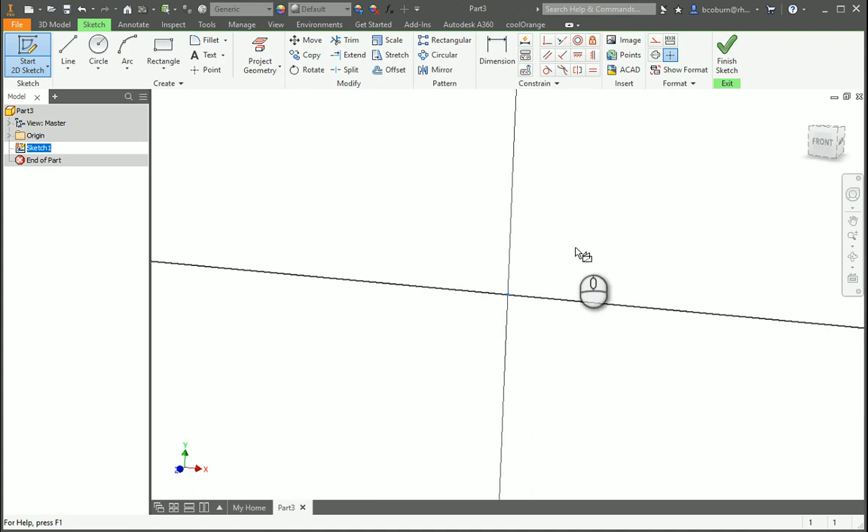So I'm going to hit Start, Sketch, click here, and draw a circle. I'll make sure it's right on the origin, and make it 0.495 because my hole is 0.5, and I need a little room for that to go in, because otherwise there's too much friction and it's not going to rotate in the real world.

I could make it 0.5 in Inventor, but then when I actually made the part, I might get into too much friction, and over time you can figure out how this works. If it's made out of wood, it wouldn't be a problem to sand it, but we may 3D print this handle. So I'm going to hit Finish Sketch.

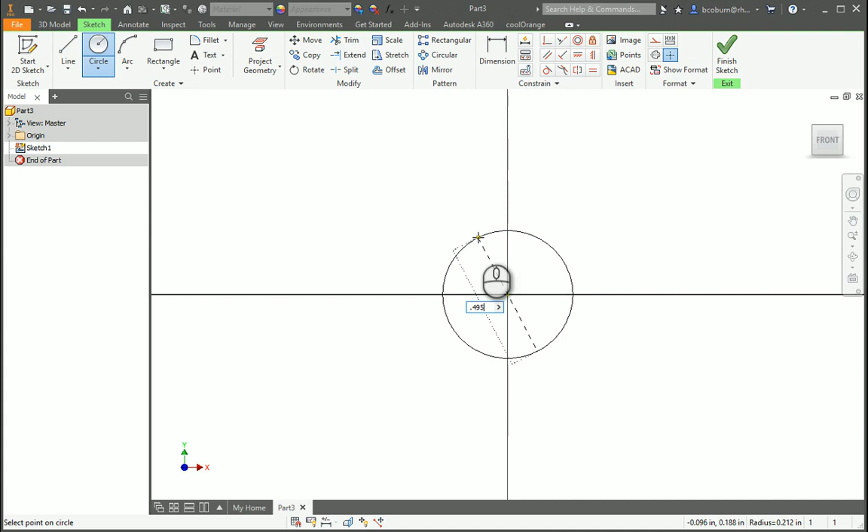And we'll have our little thing. Now what I'm going to do next is come over here and pick a plane that makes sense to me for my handle. So the YZ plane makes sense to me.

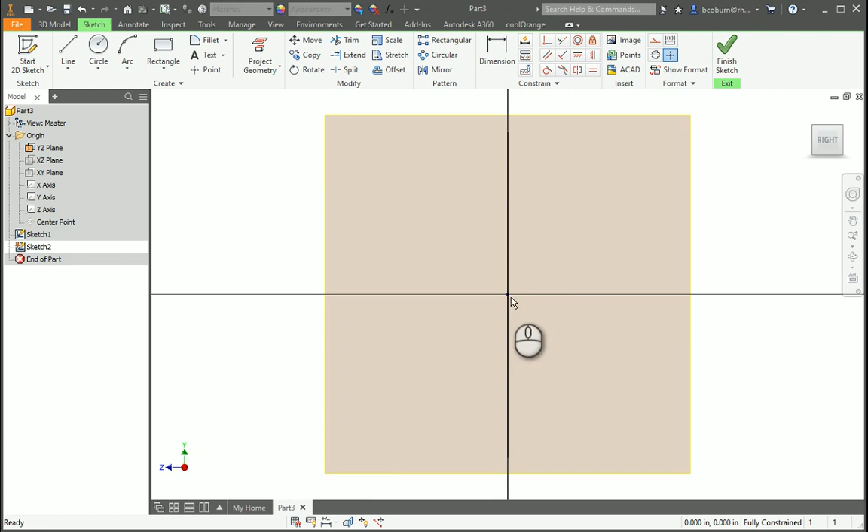So I'm going to turn on its visibility, and then start a sketch on that plane. So I now have that plane. I can see from it starts at the origin, and I'm going to zoom out a little bit, and make a line, and let's make that line come out, let's say 10 inches.

We can change this dimension later on if that is too big. So I'm going to click on the front here to zoom out, and then hit Escape.

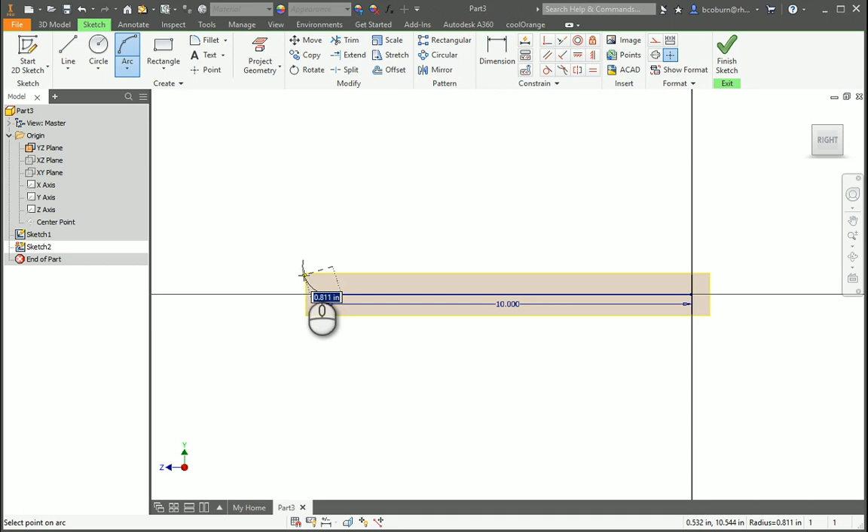And then I'm going to put a little arc on here. I'm going to come down to, it looks like it's going to be tangent, and if you can't get it, we can force it to be tangent by coming up here and using the tangent command. I want this line tangent with that arc. So it extended a little bit, made it work for us so it's nice and tangent.

And then I'm going to hit L for line, and go straight up, and let's make it... there we go. So now I have that, and then I'm going to make that tangent because I want a nice smooth line.

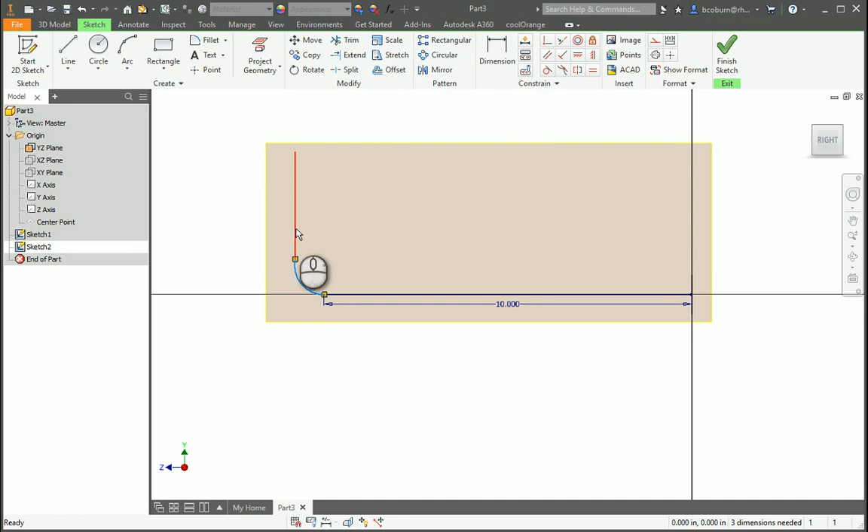Now I'm going to dimension it because, let's see, I'll probably dimension from here to there, 395. That looks fairly good, but let's just go ahead and make that 4. And again, it doesn't look like it's tangent on this, but I will double check.

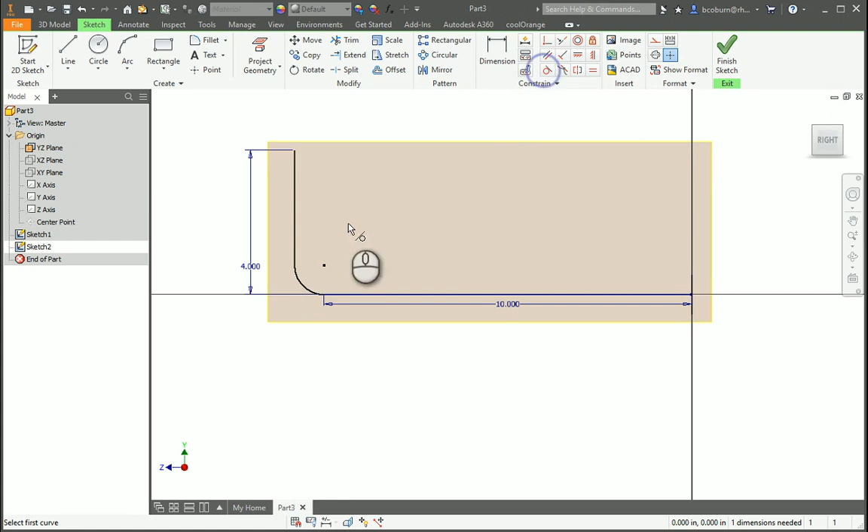It was tangent, didn't take it. So if I try to do it and it was tangent, this will happen a lot. This is how you can check for tangency. If it gives me that it already exists, then it's tangent.

And it tells me I need one dimension. I don't have to put the dimensions on it, but if I want to do it properly, I put it like that, and you can make it 0.75, let's say. So now it's all nice and tangent, got some nice round numbers.

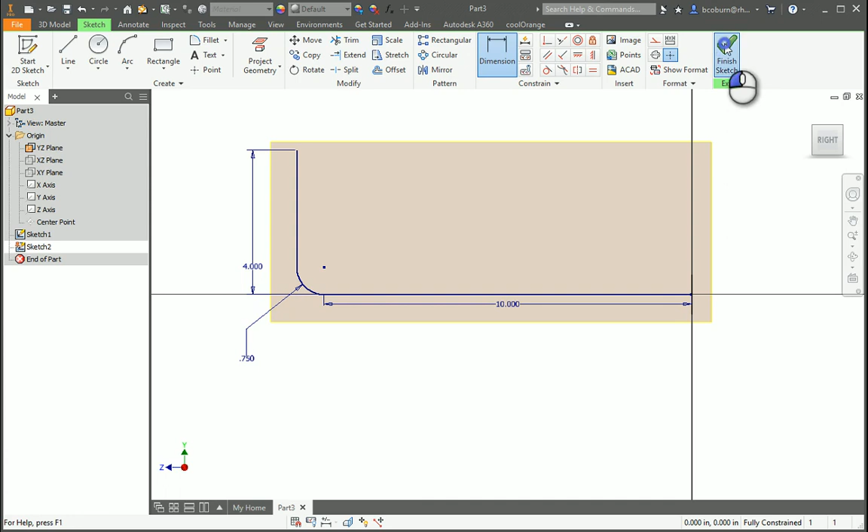Now I'm going to finish sketch. So I did 2 sketches. Why did I do that? Well, the reason I did that is I want to use the sweep command.

So I'm going to sweep this profile along this path, and I've made my little handle. I'm going to click OK. So there's my nice little handle.

Next thing I'm going to do is put a little ball on top of it because I think that would look really neat. So let's use some more skills, and I'm going to go ahead and start a sketch here.

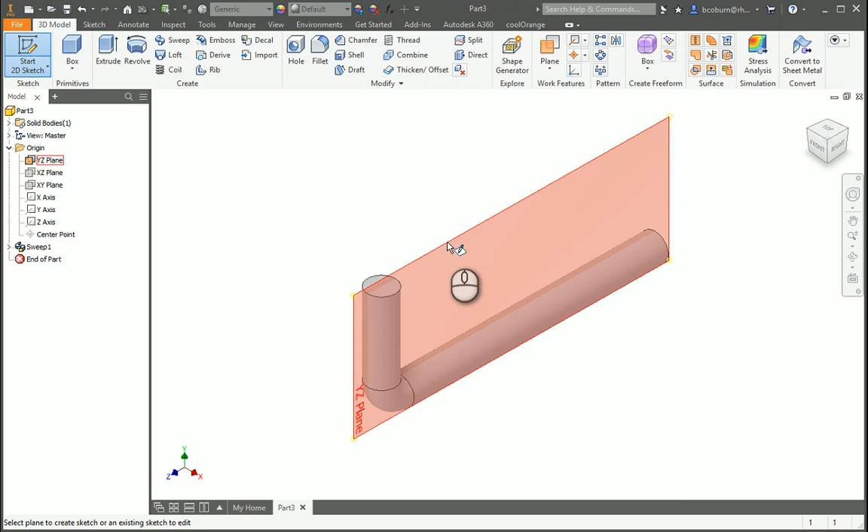And what I want to do is go ahead and slice graphics. What slice graphics does for me is it actually slices everything right down where my plane was. So now I'm right in the middle, and I can project some geometry, and Cut Edges would be a good one.

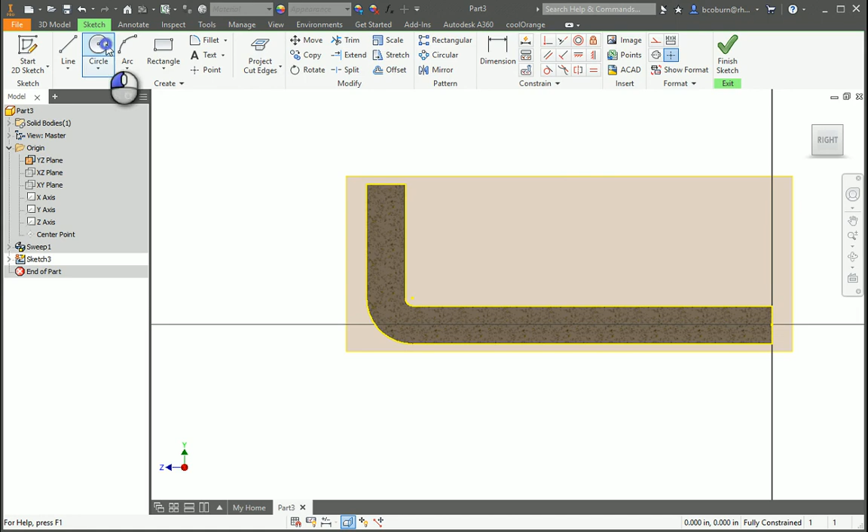So then I'm going to put a circle on top because I want to do a circle. I'm going to come up here, and I'm right in the middle. Let's say that looks like about the right size ball, 2.25.

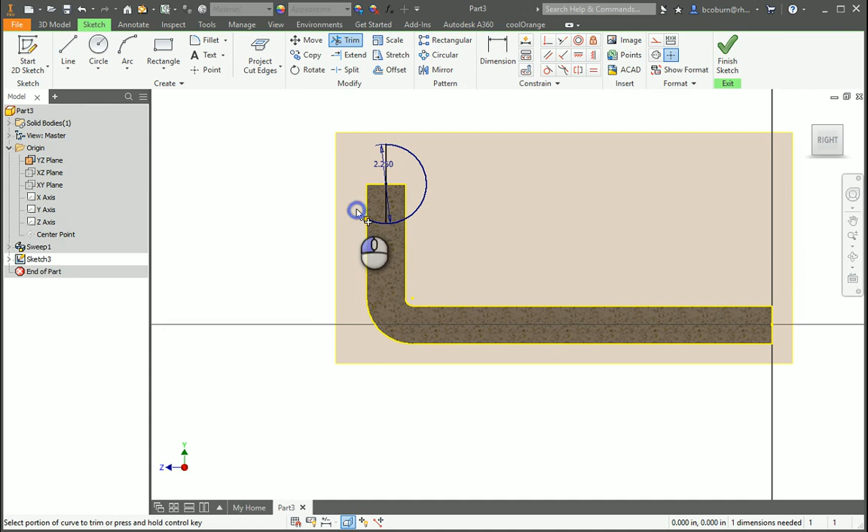So I hit that, and I'm going to put a line down the middle. So I'll come from here, go all the way up, click, come all the way down and click. Now what I'm going to do is trim out what I don't need. I don't need all this part.

And now I'm going to hit R for revolve, and revolve this around that axis. And I'm going to click OK. And there I have a nice little thing.

I can turn off its visibility. Now I have a little handle that I can put into my automata. So that's how you make a handle using a sweep.